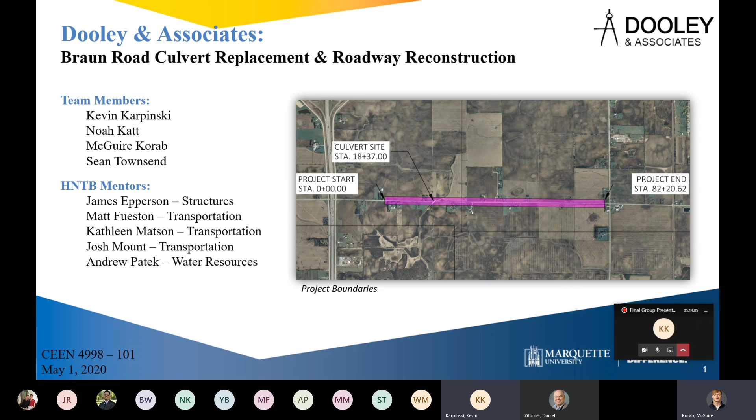So my name is Kevin Karpinski. I co-oped at Kimley-Horn and Associates with their land development team. During the 2 years I was there, I learned to create and compile plan sets for clients, primarily for multifamily complexes. I also applied for appropriate permitting to begin construction, including communication with the Illinois Historic Preservation Society, filing for a notice of intent with the EPA, and creating stormwater pollution prevention programs that contractors were obligated to follow during construction.

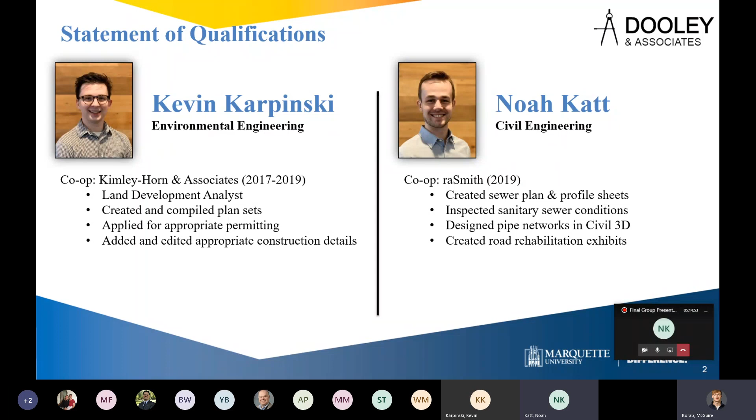I'm Noah Katt. I majored in civil engineering. I co-oped with R.A. Smith, and there I created sewer plan and profile sheets, as well as designed some pipe networks in Civil 3D, and I also created road rehabilitation exhibits in ArcGIS.

I'm McGuire Korab. I'm studying civil engineering. For my co-op, I co-oped with Jacobs Engineering in Chicago. There I worked with the Intelligent Transportation Systems team. I primarily supported plan development and quantities, and I also supported roadway and urban planning teams.

And I'm Sean Townsend. I also am studying civil engineering, and I've worked for Superior Construction as a field engineer co-op. While I was there, I primarily specialized in bridge and roadway construction, and I also facilitated subcontractor coordination as well as oversaw all night shift operations.

So a little bit about our project. Currently, Braun Road is a 2-lane rural highway in Mount Pleasant, Wisconsin. Our objective for the project is to expand the roadway to accommodate future traffic for Foxconn development in the area. It's anticipated that Foxconn will also be bringing increased industrial development in the surrounding areas around Braun Road.

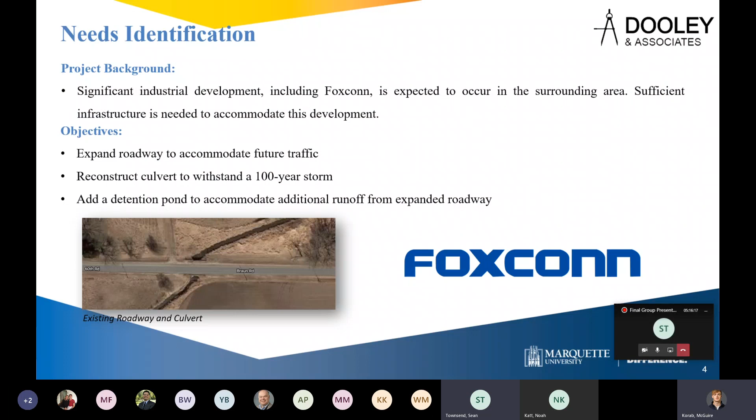So our objective is, like I said, to expand the roadway and to also reconstruct the culvert over a small stream to withstand a 100-year design storm. We are also adding a detention pond to accommodate additional runoff from the expanded roadway. So for this project, we had 3 main sub-disciplines. Kevin and Noah handled the water resources engineering, McGuire handled the transportation engineering, and I worked with the construction engineering aspect of the project.

So these are the places that we collected a lot of the background information. From the NOAA website, we collected all the rainfall data to model the design storms. From the Racine County map book, we gathered the elevation data and right-of-way locations. And we used the WisDOT Facilities Development Manual for both roadway standards and pretty much everything, including the culvert design and the detention pond design.

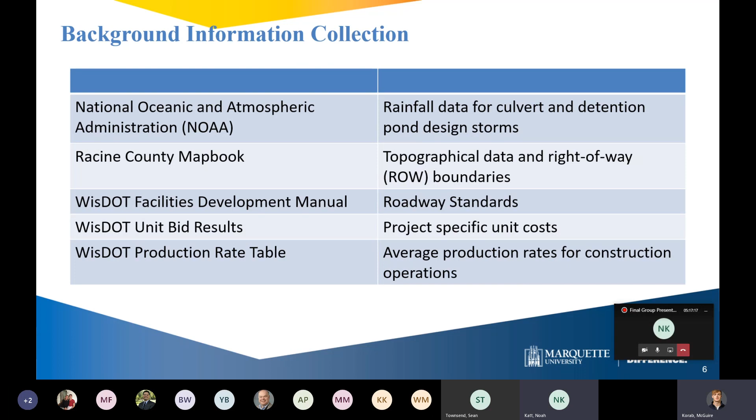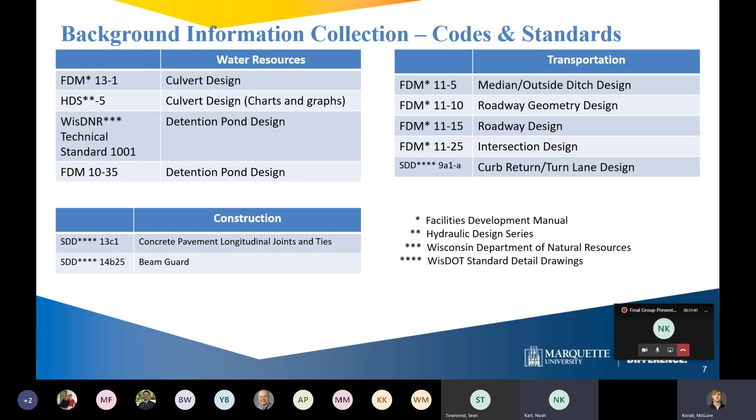Then we used the WisDOT unit bid results for project-specific unit costs, and the WisDOT production rate table for the average production rates for construction operations. And then here is just an overview for all the codes and standards that we used for each specific subdiscipline. It included a lot of the Facilities Development Manual, Hydraulic Design Series for the culvert, the Wisconsin Department of Natural Resources for the detention pond, and the WisDOT Standard Detail Drawings for transportation.

And here's an overview of the watershed of the culvert. It is approximately 740 acres, and it is divided into 12 different subbasins. Currently, all of this flows to the existing culvert, which is designed to withstand a 10-year storm. And because of the proposed development, we wanted to increase that to a 100-year storm. And additionally, due to the expanded roadway, there would be a lot of additional runoff from impervious land. And for that, we wanted to design a detention pond to withstand a 25-year storm.

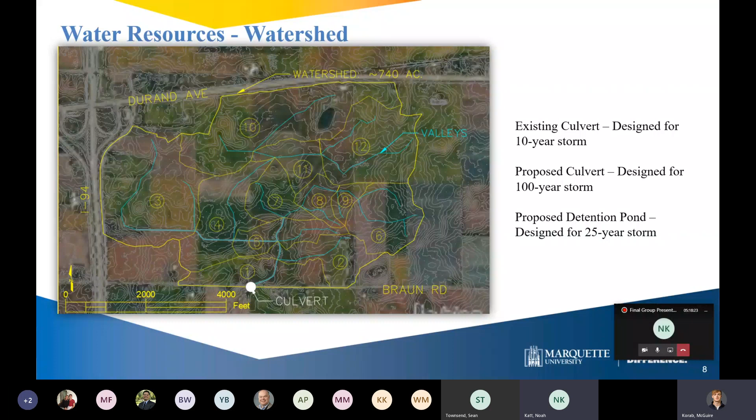So for water resources, we had a couple different alternatives. For the detention pond, we were going to decide whether we wanted to use the 25-year average design storm or the 25-year upper bound design storm. And the difference between those is the average storm had a 90% confidence interval, while the upper bound design storm had a 95% confidence interval. Then for the culvert, we were deciding between a single barrel and double barrel culvert and whether to use cast-in-place concrete or precast concrete.

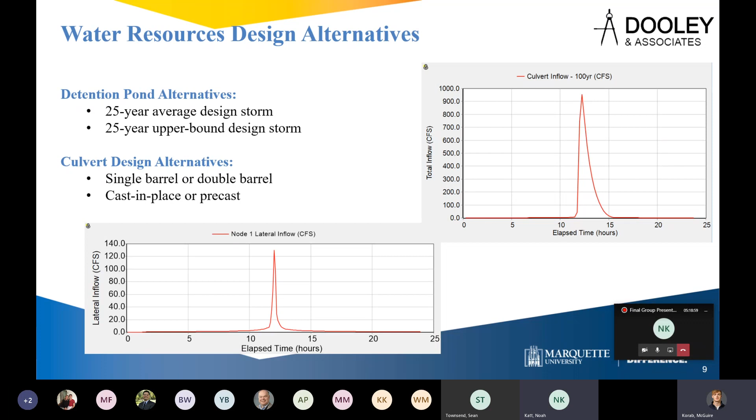So I'll elaborate a little bit more about the water resources design choices for this project. Obviously, we're deciding on the detention pond and the culvert. And I'll discuss the culvert first. There were a total of 4 parameters that we had to choose from. So we were deciding between a cast-in-place and a precast culvert. And we were also deciding between a single barrel and a double barrel design.

We decided that the cost and ease of constructability were the 2 most important decision criteria for Foxconn's sake, who's going to be on the site, and were awarded the heaviest weights. We also considered sustainability and the hydraulic capacity in our designs. A precast design was selected over the cast-in-place design due to how quickly it could be constructed, and a double-barrel culvert was chosen due to the availability of construction phasing, which Sean's going to touch on a little later on in the presentation.

As far as the detention pond goes, we were forced to choose between a 25-year average design storm and a 25-year upper boundary design storm. Because our client did not show any concern or specify which storm should be used in design, we chose the average design storm as being appropriate for this project. This allowed for significant cost savings for Foxconn and also allowed for an easier and quicker construction.

Should Foxconn have decided to settle with the larger design storm, there would be a larger storage volume, and there would be much more stress on the construction team to complete the project within the single construction season that they were allotted.

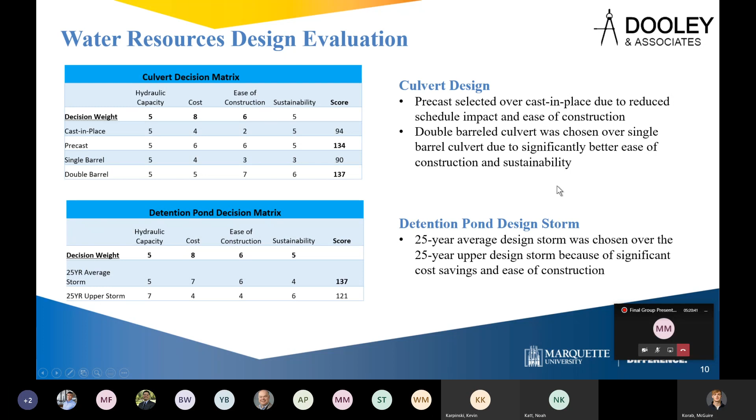And for the rest of the hydraulic calculation for the culvert, we used the culvert design form in Hydraulic Design Series 5. And we estimated the headwater to be approximately 734.68 feet, which is significantly below the crown elevation of the roadway.

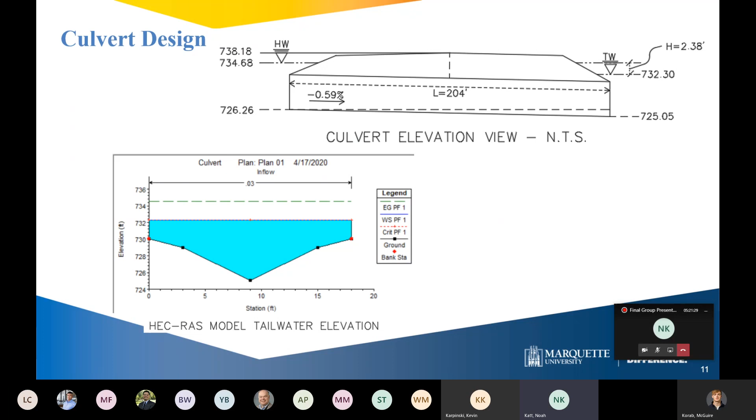So I'll talk now a little bit about the design of the detention pond. We decided that there was an ample amount of relatively flat land south of the roadway to place the detention pond. The northernmost corner of the detention pond is 75 feet away from the proposed shoulder of the roadway. The calculated surface area was about 21,000 square feet. However, that elicited a depth that was considered too deep in terms of safety. It was close to about 14 feet.

So changes were made to implement a safer depth. We decided to expand that surface area to a little over 29,000 square feet. So that depth from the top of the permanent pool surface area to the bottom of the pond was reduced to the minimum of 3 feet.

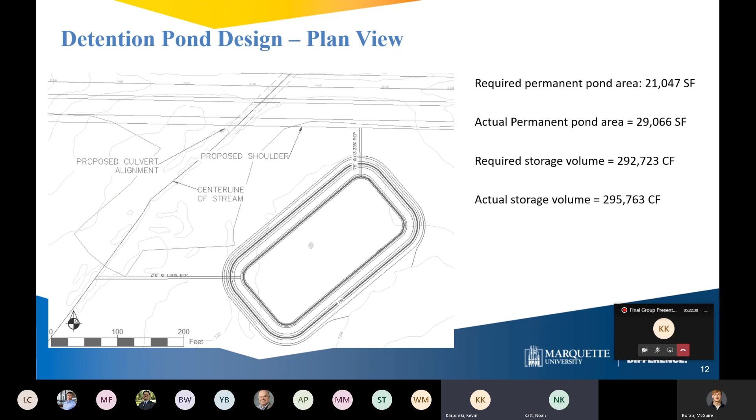And the FDM also made sure that this pool had at least 2 feet of sediment storage because the permanent pool surface area was above 20,000 square feet. And so if we had made the permanent pool surface area below 20,000 square feet, we could have used a lower volume of sediment storage instead.

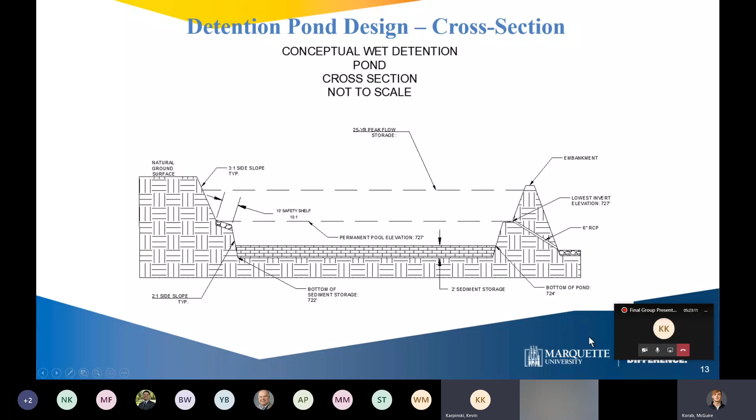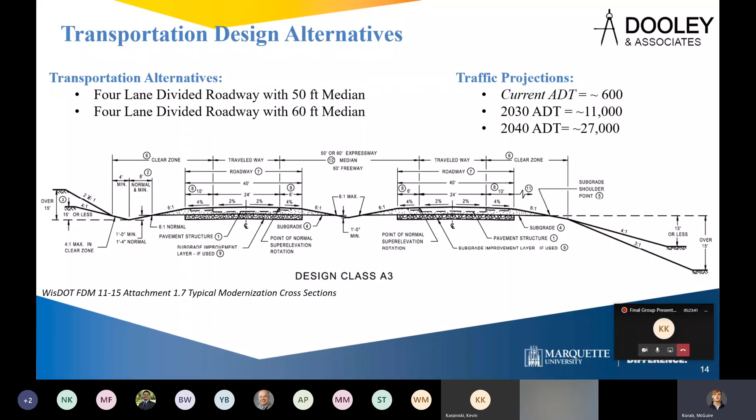So for the transportation alternative, we were tasked with designing a roadway to accommodate the projected traffic. Our design was to focus on the future roadway expansion via additional median lanes. The two final alternatives proposed included a 50-foot and 60-foot median. The figure shown is a typical roadway section from the WisDOT Facilities Development Manual. And also shown is the current and future ADTs.

So comparing the two alternatives, we found that we could expand the roadway sufficiently with the 50-foot alternative at a reduced cost, as a larger median would require more earthwork. The figure below depicts a typical roadway cross-section. All design characteristics were derived from the WisDOT Facilities Development Manual.

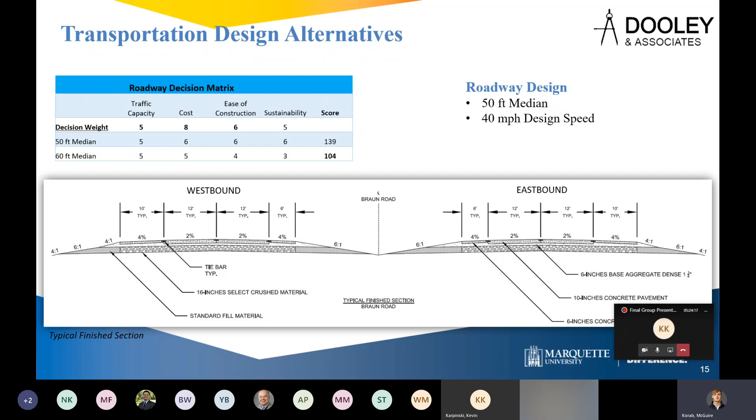The roadway features four 12-foot lanes with grading as shown. The travelway consists of 10-inch concrete pavement, a 6-inch base aggregate, and 16 inches of select crushed material for the subgrade improvement. Additionally, to depict the future possible expansion, we have our proposed 6-lane configuration compared to the 4-lane configuration. The roadway features an additional 12-foot inside lane along with the underdrain along the median.

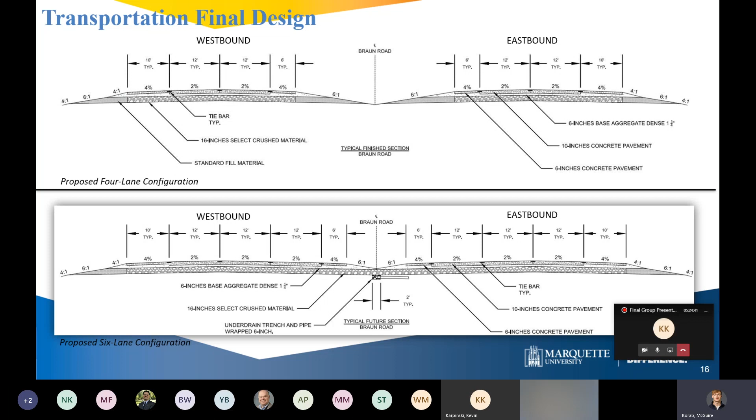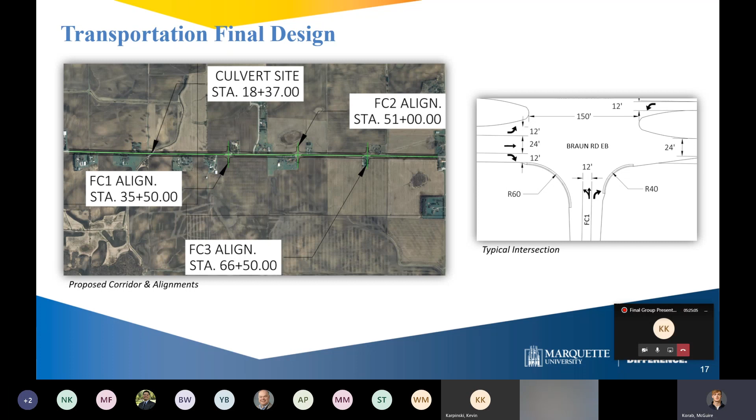Okay, so on the construction side of things, as the other guys alluded to, two of the biggest alternatives that we had to consider were cost and schedule impacts. Some unique features for this project were, first, that the entire project needed to be completed start to finish within one construction season, so between April 1st to November 30th. And we also had to maintain 2 lanes of traffic throughout the duration of the project.

So in terms of cost, this impacted the project because we had to implement 2 phases. Anytime we're implementing more than 1 phase, we're obviously going to see a rise in cost because the contractor has to mobilize and demobilize in between each phase. So that was something we had to be conscious of. But we also looked at concrete pavement versus HMA pavement in terms of design life, construction costs, and also maintenance costs into the future.

Then, as Kevin talked about, we did look at the box culvert construction, whether we wanted to go with a precast culvert or a cast in place, as well as how we were going to do this while maintaining traffic. So can we do it in 1 barrel? Do we need to go to 2? That's something we were considering. And we ultimately ended up going with the precast culvert because of its schedule implications. We didn't have to eat into our schedule to form it up and pour it. So that was a big thing on our side.

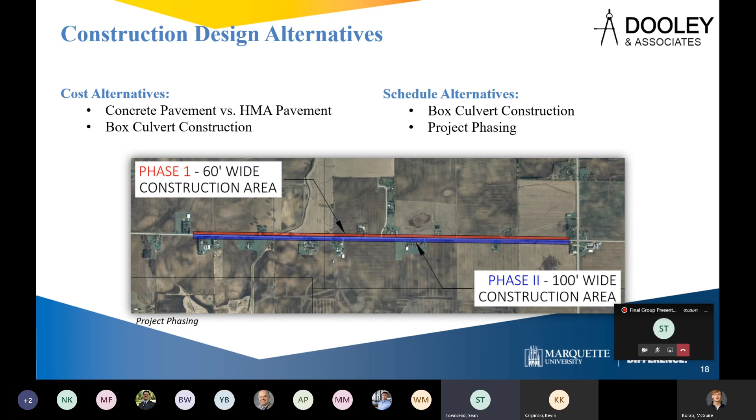So yes, in summary, we did go with the concrete pavement. It's a 10-inch pavement, and we did go with the precast box culvert. The reason for the 10-inch concrete pavement was the increased design life. While there are some more upfront costs involved, we determined that the maintenance costs were far less than an HMA alternative. And we were also considering how truck traffic would influence the pavement design. So we chose the concrete because it did have more durability as opposed to the HMA design.

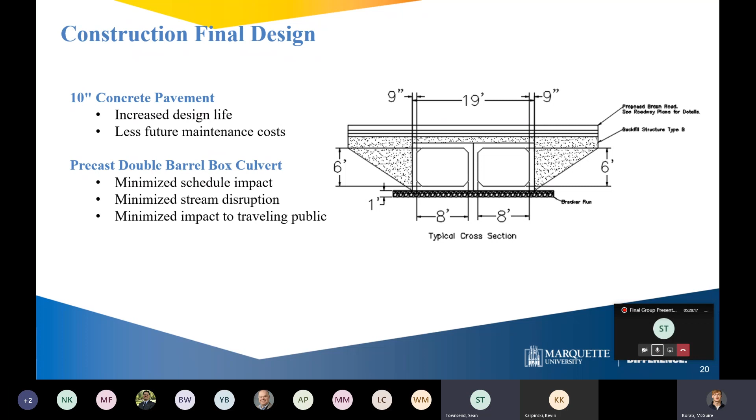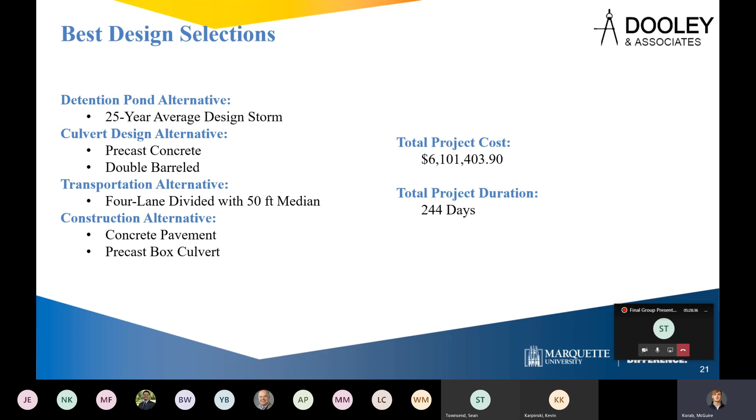When we were looking at the precast culvert, as I mentioned before, the schedule impact was very, very important to us. And it also minimized the stream disruption. And doing the 2 barrels allowed us to keep both lanes of traffic open at all times throughout the duration of the project. Just to recap, the final design selections for each subdiscipline are shown here. The project came in around $6.1 million with an expected duration of 244 days.

And so in addition to the presentation and the final report, we will also be turning in a hydraulic analysis report, a cost estimate, a plan set, and a project schedule. And that concludes our presentation. Thank you very much for listening, and we'd love to answer any questions.

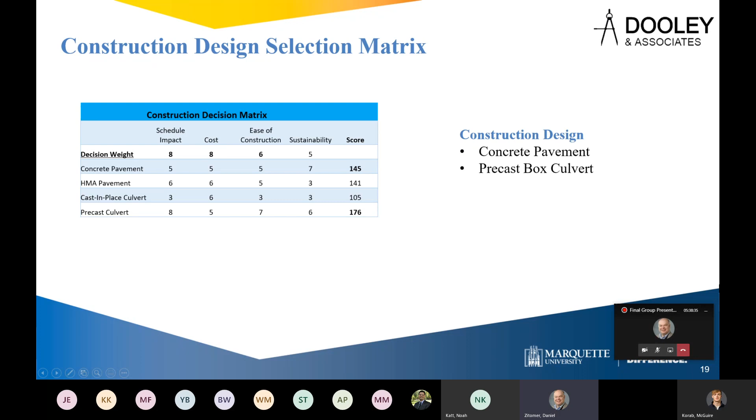Okay, any other questions for Dooley and Associates? Okay, hearing none. Thank you very much, Dooley and Associates. Good job. And with that, we've concluded all 10 project presentations, an outstanding group of presentations, outstanding work by all the groups involved, especially given the COVID difficulties that have arisen this semester. Really did a fantastic job. I'm so happy to be part of this group and this class. It really was an honor to be involved.